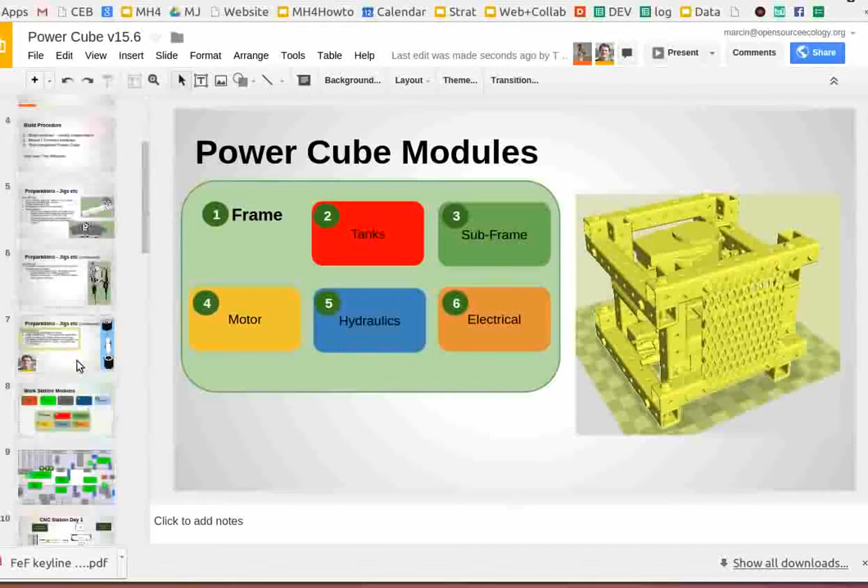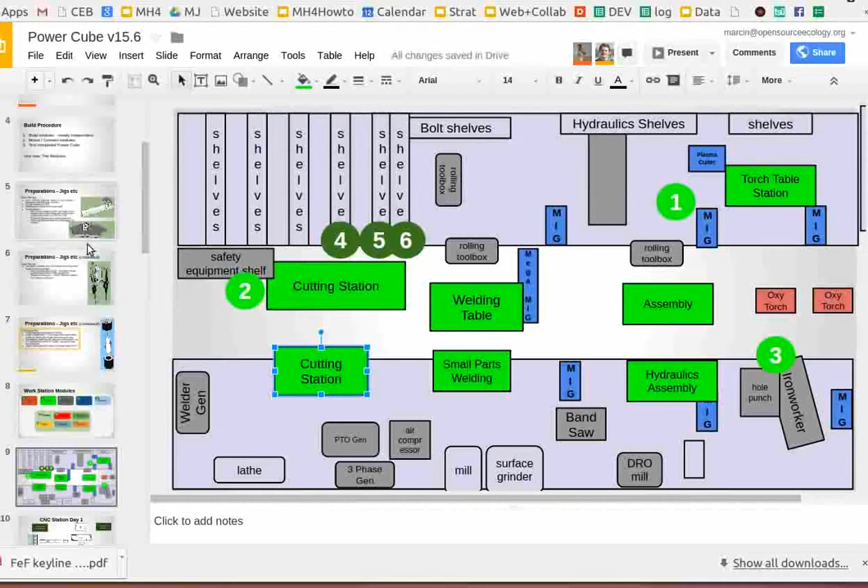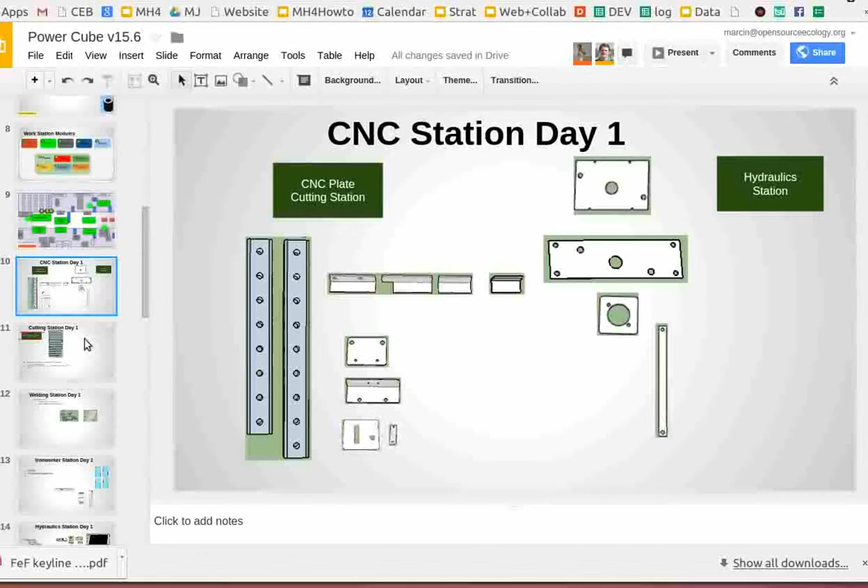So we're designing for 6 parallel teams to build 6 power cubes, a team of 4 people each. So we're planning on about 24 people at the workshop. Now, we've broken down a number of modules to be specific, or basically more by the function. So the 6 different workstations would be, there's cutting with CNC, so we're looking at having the CNC cutter. There's cutting by abrasive saw.

There's welding with our welders. Ironworker station for punching and shearing. There's a hydraulic station for assembly of hydraulics. And then there's a tank welding station, or cutting and welding. The tanks are actually going to be the main challenge of the entire event, because that requires gas-tight ability to weld, which requires technique. And that's not an entry-level job.

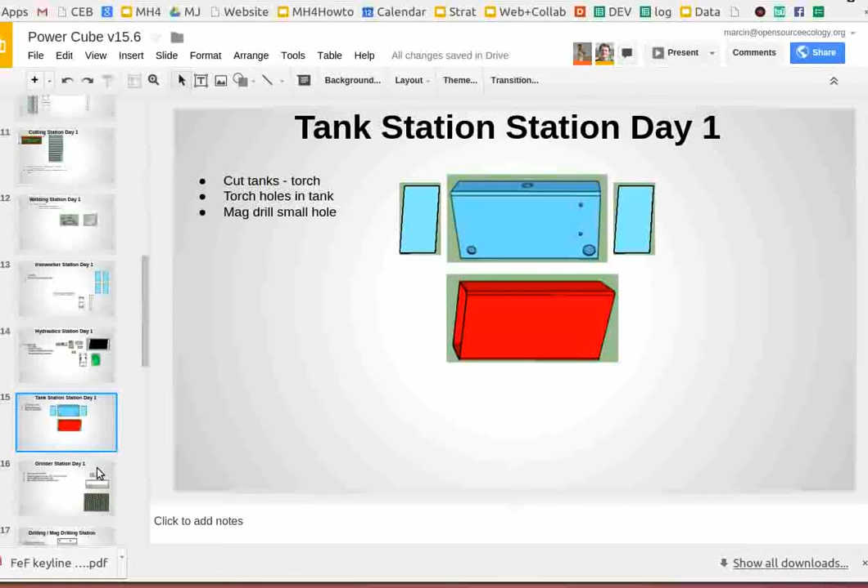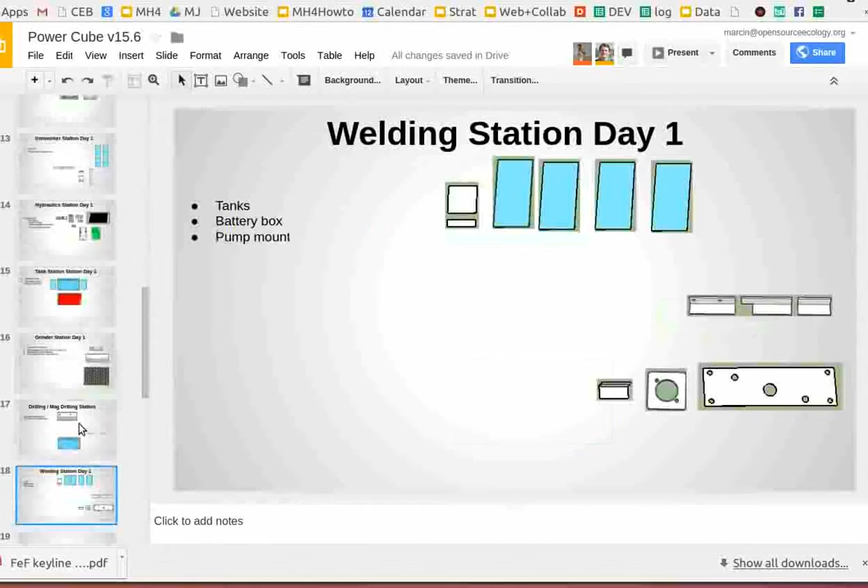Two skilled people will have to do that during the workshop. There's also going to be a grinder station where we grind out a few parts that we need to. Drilling and mag drilling station for some of the holes that can't be done using the hole puncher, such as when it's at an angle where you can't get the hole puncher bit in there, or when it's in a tank. You can only do holes with the hole puncher on flats, not on tubes or anything like that.

So there's going to be a welding station, safety, etc. And right now there's one jig that Tom actually came up with for how do you do an effective... basically the pump mounting to the engine is the most precise part of the entire process. If you look at the Power Cube itself, basically, you've got the engine unit. Let's see, this is looking at this off Google Warehouse.

Basically, the most complicated part of the assembly process, you can say, is mounting the pump on the engine. That requires a precise distance between the pump and the engine, precise distance and perfect parallel alignment. Perfect parallel and perfect distance for the pump from the engine, so that when we build it, we can work on the module.

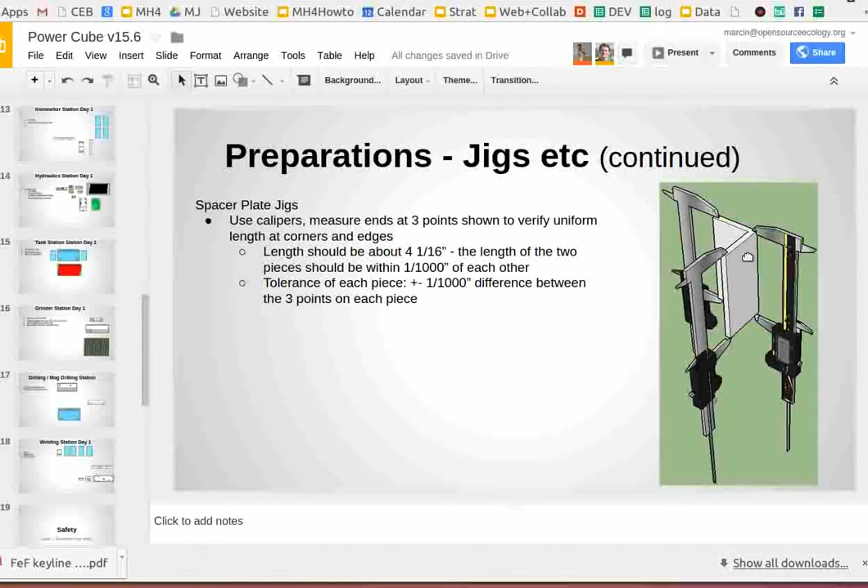Right now we're going through the specific directions for how to now continue with the build. So we're going to the Power Cube document. Let's see, so on the preparation of the jig, Tom, you've got the basic spacers for mounting the pump. So basically the detailed procedure is we're going to first cut the angles, we're going to then measure them. Explain, Tom, what you're doing in preparations, slide 5, spacer plate.

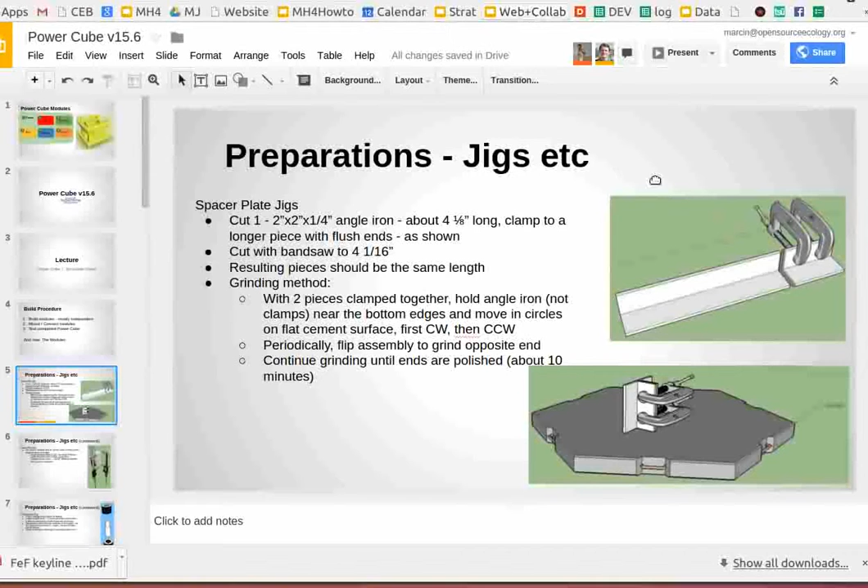On the preparations, what we're going to do is cut 2 angle iron pieces, and these 2 angle iron pieces are to be used as spacers, to space the pump mounting bracket, the 2 plates in the mounting bracket, so that they'll be as parallel as we can get the 2 surfaces.

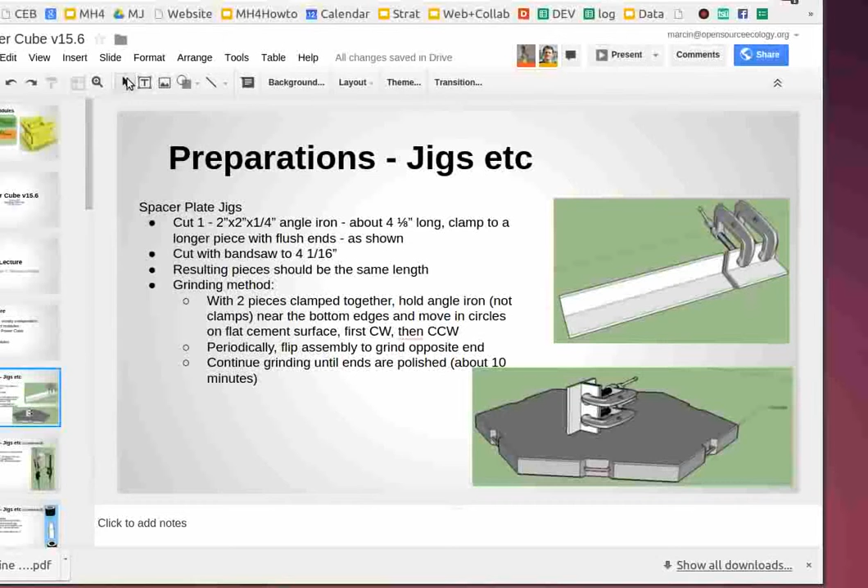And so to do this, first of all, we take just a piece of angle iron and we cut off a piece about 4 1/8 inch long, and then clamp that onto a longer piece with the far ends parallel. We can just use a square or a flat piece of metal, whatever, to position them so that the ends are flush with one another, and then clamp the 2 pieces together very securely using some C-clamps or other heavy-duty clamps.

And then put that back in the bandsaw and cut the other end of it. But when you cut it, you cut both pieces, just maybe a 1/16 of an inch off the end of the one that's already cut, and then cut all the way through the other piece. So the result is we'll end up with 2 pieces cut exactly, with both ends flush. Okay. So that should be 2 pieces the same size.

And then once we get that, the bandsaw is going to have teeth on it, so it usually cuts with a little bit of a rough surface. You run your fingernail over it, and you can feel the ridges where the teeth were cutting through the metal. So for a more precise alignment of the plates, we'd like to get this polished a little bit more. So then in the second drawing, you can see down at the bottom.

You want me to do a screen share so I can show this? You could do that. Yeah, go ahead.

Desktop, start screen share. Okay, so this is the first piece right here that I was indicating. So we clamped, this would have been one solid long piece, and then we cut 4 1/8 inches off of it and put it on top of this piece and clamped it securely. Made sure the ends of it were flush over here, and then took the bandsaw and cut again.

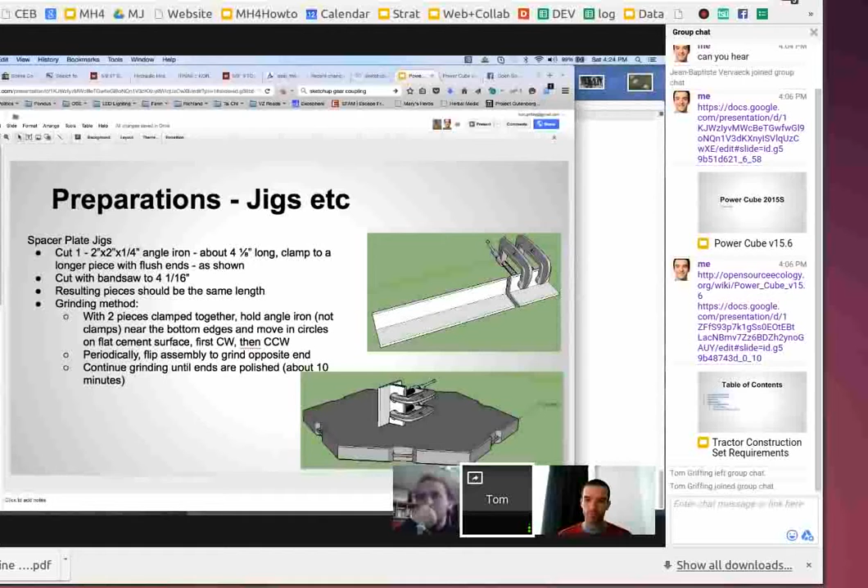I mean, you've done it. You've succeeded at this, and we're going to see ourselves in the workshop how, with rubbing a piece of metal on a piece of concrete, we're going to get it down to 1/1000th of an inch accuracy in length. That's amazing. It's an old technique they used to use in grinding telescope lenses. And of course that kind of grinding had to be very precise.

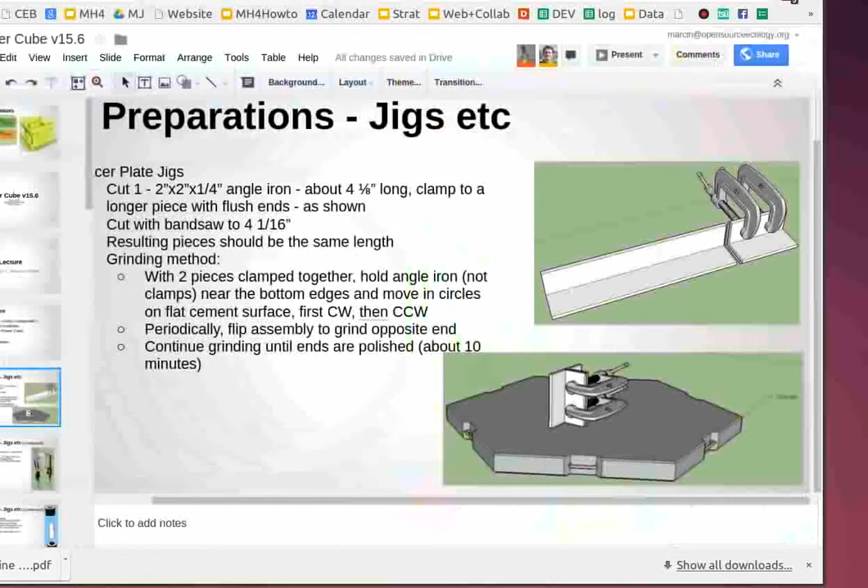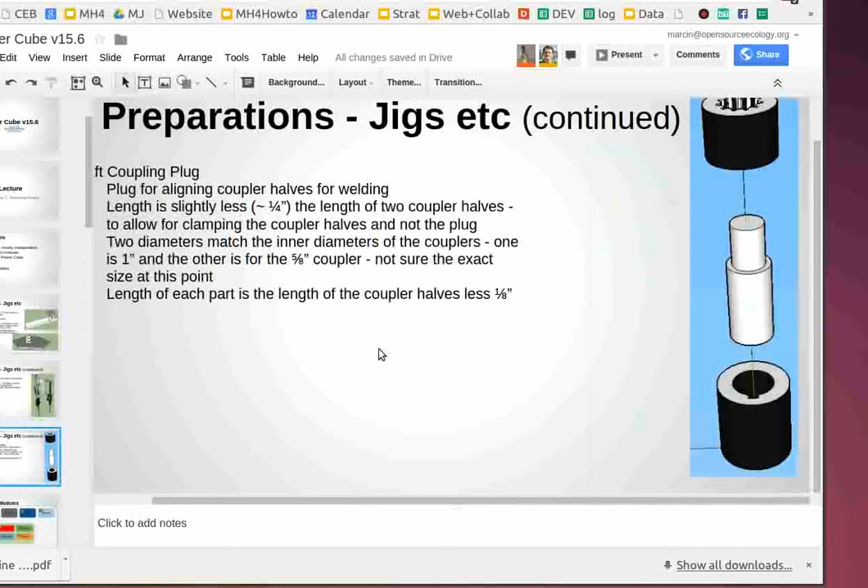And so when we're finally done, these two pieces will be used to put in between the plate that the pump mounts on and the other plate that suspends the pump off the top of the tanks. Those are the 2 plates that are important that they be parallel, because then we mount a third plate on top of that. It's the engine plate. And so the end result is that we want the shaft of the hydraulic pump to be exactly in alignment with the engine shaft.

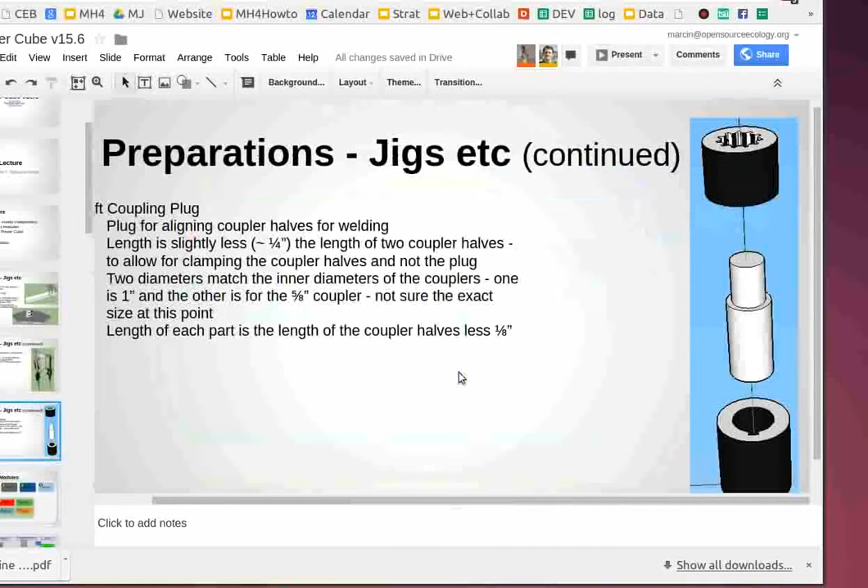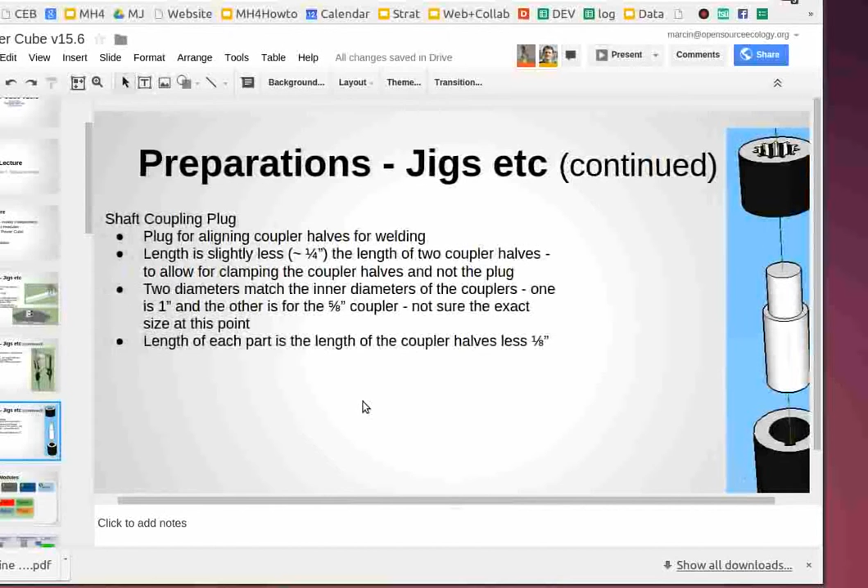When we get to welding the spacers onto the pump mounting bracket, there are a few techniques so we can make sure the spacers stay aligned. The essence of that technique is to clamp it tight and do gradual welding.

Actually, we don't really clamp it tight to begin with. What we do is start with just one piece, say the longer piece, and then position the angle iron pieces on that. We're going to have four pieces of angle iron.

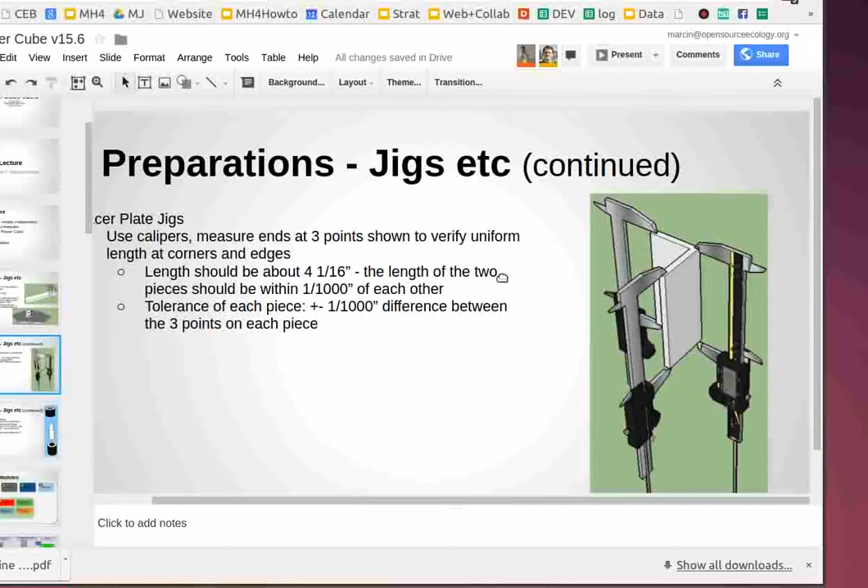The spacers we just created are going to be about 4 and 1/16 inches long. The actual other pieces that get welded to the pump mounting bracket are going to be slightly shorter than this, so we'll have a little bit of space because these are just the spacers.

Do we use these to weld, or no? These are just our jigs, and we can reuse them from one bracket to the next. So we generate one of these jigs and we can use it multiple times.

The point is, when we cut the other ones, they don't have to be exactly the same length because you fill it in with the welding. They don't have to be terribly exact. There you got the pump bracket.

So you can essentially cut just with a cut-off saw or an abrasive metal saw, and because you have the precise spacers, these can now be welded just like they are.

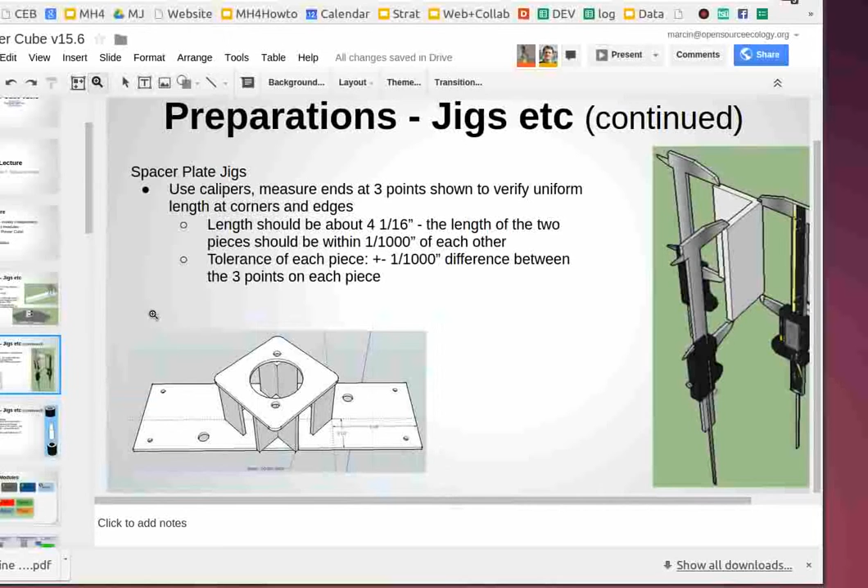The way we would do it: first of all, you see how the angle iron pieces are on the left and right on the drawing. When we go to weld that, I would go on the inside of the hole here and weld the very corner, welding it down to the plate so that when the weld bead cools, it tends to shrink just a little bit, and so it will secure the entire angle iron piece to the plate.

Without tipping it to one side or the other. If we welded on the outside anywhere, it would tip it in one direction or another, because it has the feet of it that are next to the metal already, so it can't bind down. That's very important.

So basically that's a tack weld on the inside, and then we get all those tack welded, and then go back and put a nice bead all the way around. And just to make it super strong, I put a weld on the inside and on the outside.

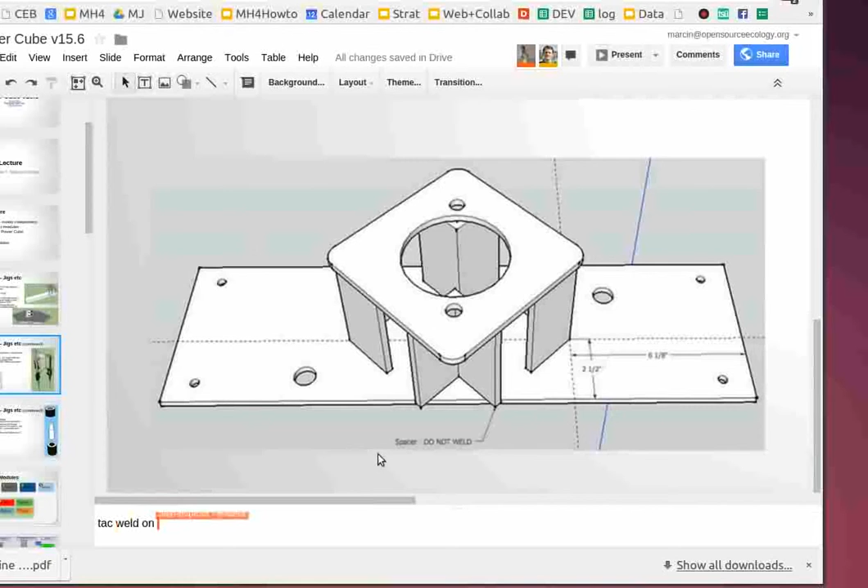We would weld it both ways. The way I would start out is by welding those first to that 6x6 plate that has the hole in it, and then invert that with the spacers, and then weld it to the longer plate.

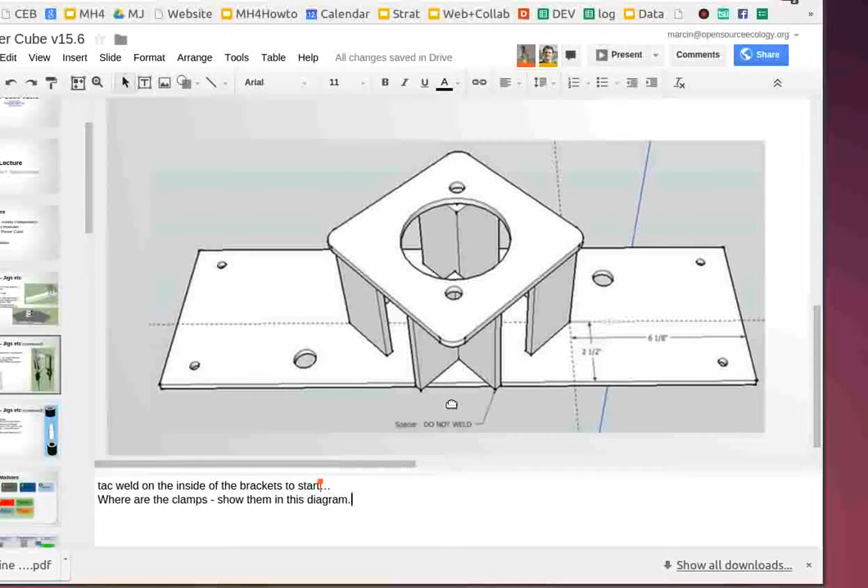Because we have a little bit of shrinkage of some of the weld pieces, it usually takes a crowbar or something to get the spacers out of there, out of the jig. So can you draw, when you do the detail, the clamps and a pry bar, things like that? I can do that.

Where are the files for these explainer pictures here? Is that within the original file, or is that a separate file you're using?

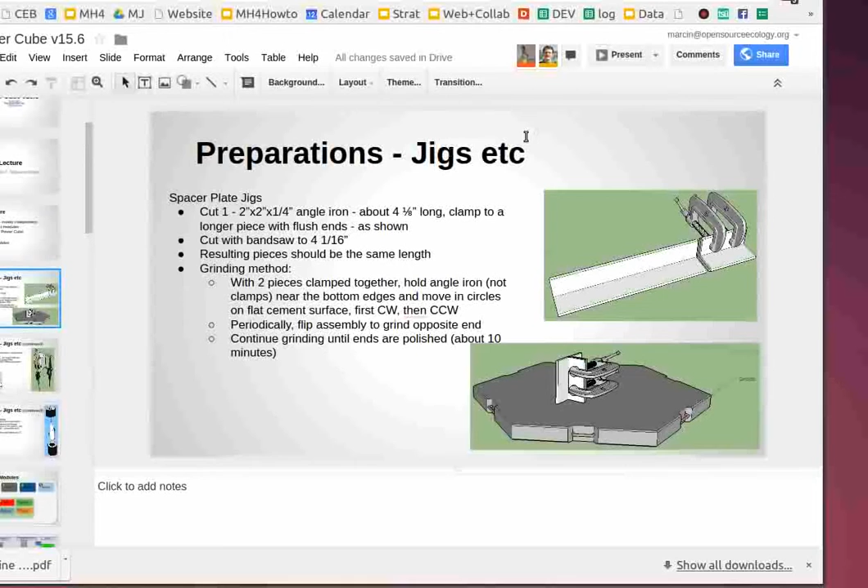When you have your jig pictures that you screen copied, is that the same file as the source file for the CAD? Oh no, I just drew those up just for this presentation, I did it just a little while ago. Okay, can you upload that source as well?

That would be useful too. Do you want it in the warehouse? Yeah, the warehouse would be good, just so if we have to modify it or make changes on these, we can just download them again or modify them.

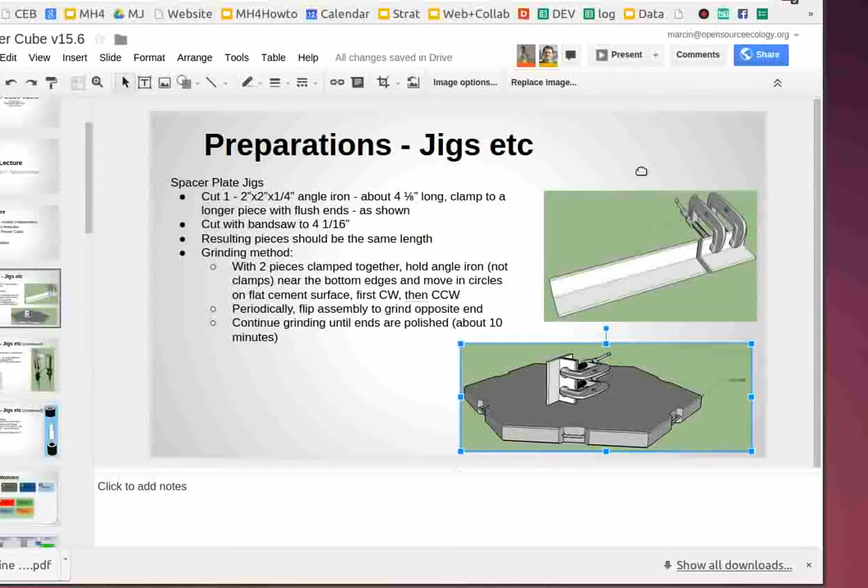We want to use these elements for other parts too. Could definitely use the clamps, just a little library. I mean those are good clamps, we'll take them, like the C clamps and that kind of thing. I just found those on the warehouse. Yeah, that's great, they were out there.

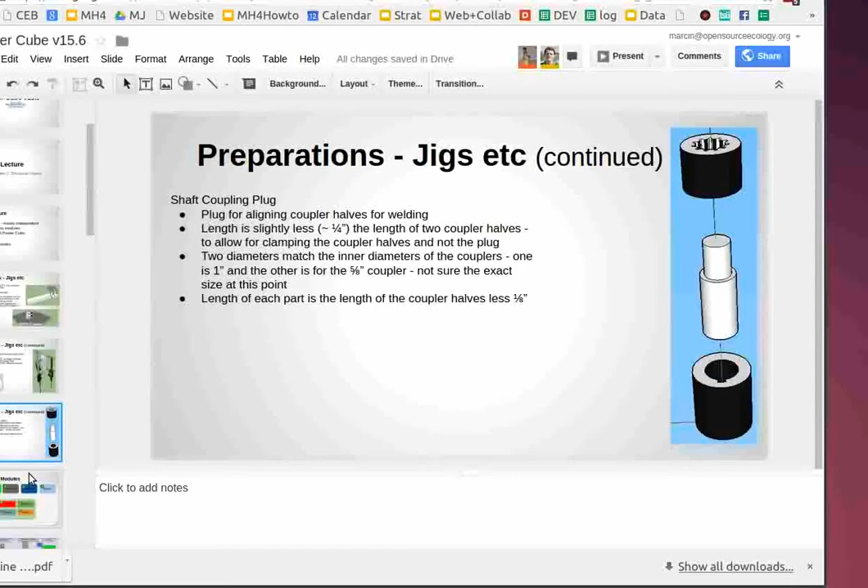Excellent, looks like it's all coming together, good explanations there. So let's continue on detailing the workstations like we started yesterday. Yeah, so I think we're in good shape on that.

That's a good tutorial on the jigs, which pretty much if you can understand how to weld the pump on straight, that's the main thing. The only other non-entry level task is welding the tanks, but other than that it's all just bolting things together. Next slide down, I have the jig also for the shaft coupling plug.

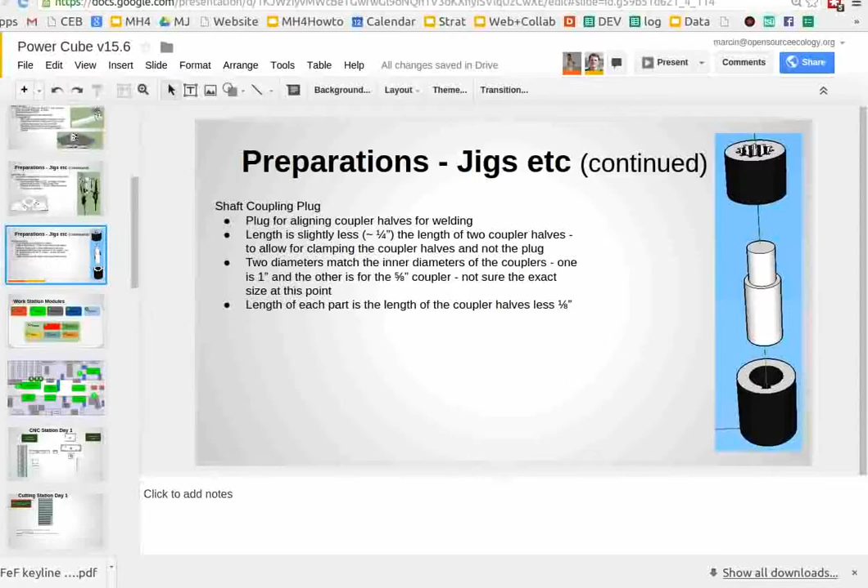Yep, and so that one I just started on. I was typing it up while we were talking earlier. And this one is for aligning the two shaft couplings.

Now this time the engine shaft, the coupling for it is a 4 inch long piece, and I think we can still cut that in half, and that should be plenty strong enough on the engine side. But with the 5/8 inch shaft, the shaft on the pump itself is 1 1/4 inches long, and the coupling that we get for that is also 1 1/4 inches long, so we can just use it in one piece.

So we need to make a plug for this to match and align the two halves for welding, because this is a similar kind of issue. In order to maintain the shaft alignment, we've got to get these welded exactly right.

So in doing that, I'm going to have the plug made to where it will maintain alignment using the inner surfaces of the shaft couplings. The plug is going to be a little bit shorter than both of the couplings together, so that when we assemble it, we put the plug inside one half and then put the other half together, and then clamp it all together with a C clamp. The C clamp will clamp against the coupling halves and not against the plug, and then we just weld it.